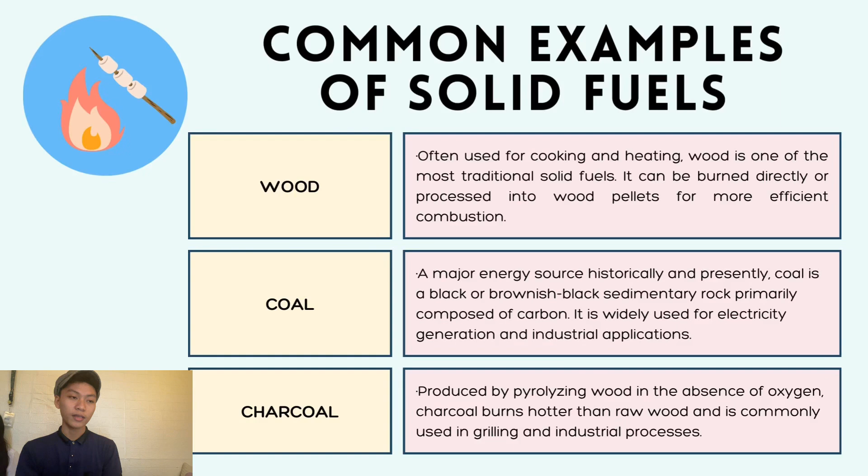Let's proceed about the characteristics of solid fuel. Number one is moisture. This is the water contained in the wood. When you burn wet wood, the water must evaporate first, which wastes energy. Dry wood burns better because it has less moisture.

Number two is volatile matter. These are gases that are released from the wood when it heats up. They include things like smoke, carbon dioxide, and other compounds that burn in the air. The more volatile matter, the easier it is to start a fire.

Number three is fixed carbon. This is the solid part of the wood that remains after the volatile gases have been released. It's what actually burns to provide heat and energy. Higher fixed carbon means the wood produces more heat.

Number four is ash. This is the leftover material after the wood has completely burned. It's made of minerals and other non-combustible elements. Ash doesn't provide energy but can be used as fertilizer or

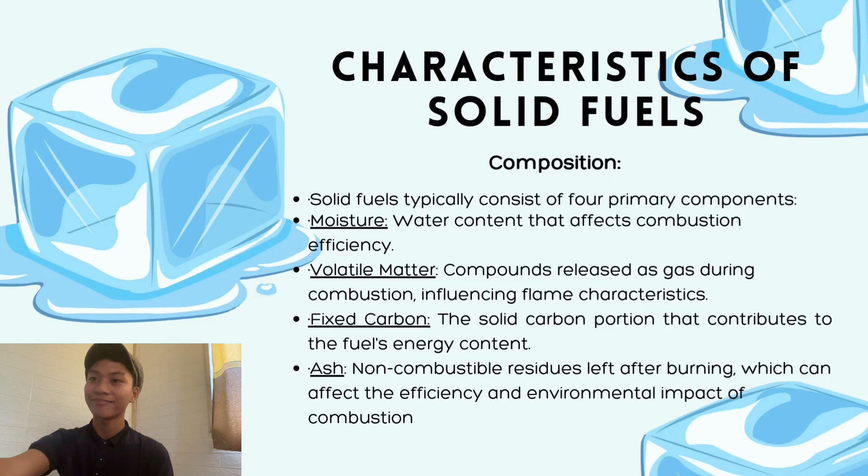disposed of. Now let's proceed to calorific value. This measures the energy released during combustion, expressed in units such as megajoules per kilogram. Solid fuels vary widely in calorific value. For example, coal has a higher calorific value compared to peat, which has one of the lowest.

Burning characteristics: solid fuels exhibit different burning behaviors based on their composition and structure. For instance, wood burns with a visible flame and produces smoke, while manufactured fuels like pellets tend to burn more cleanly and efficiently due to their uniform size and composition. Burning characteristics describes how wood burns, including speed and efficiency.

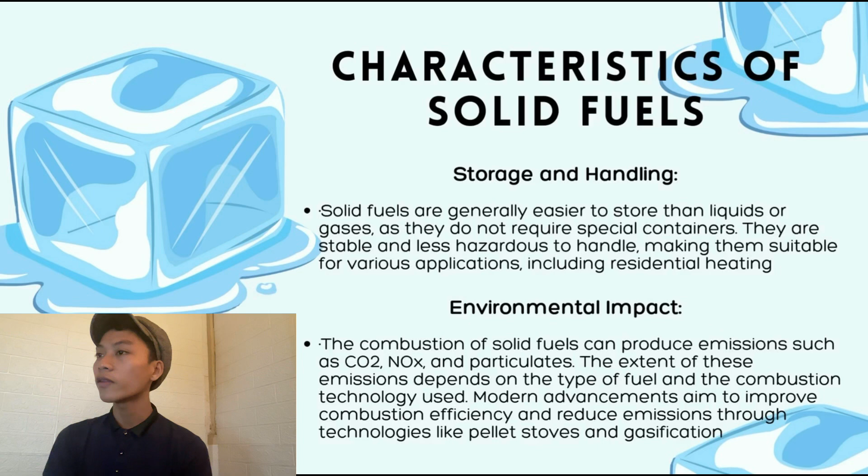Storage and handling: solid fuels are generally easier to store than liquids or gases, as they do not require special containers. They are stable and less hazardous to handle, making them suitable for various applications, including residential heating. This impacts the quality and ease of burning wood.

Environmental impact: the combustion of solid fuels can produce emissions such as CO2, NOx, and also particulates. The extent of these emissions depends on the type of fuel and the combustion technology used. Modern advancements aim to improve combustion efficiency and reduce emissions through technologies like pellet stoves and gasification. Environmental impact depends on the sustainability of the wood source and how it is burned.

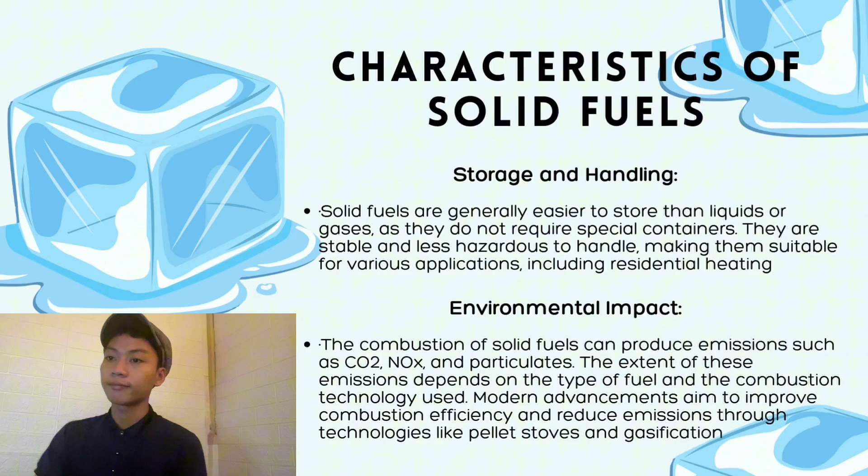Lastly, solid fuels also differ in renewability. Biomass solid fuels such as wood and other agricultural residues are considered renewable resources, while fossil-derived fuels such as coal are considered non-renewable resources as they take a long period of time to form.

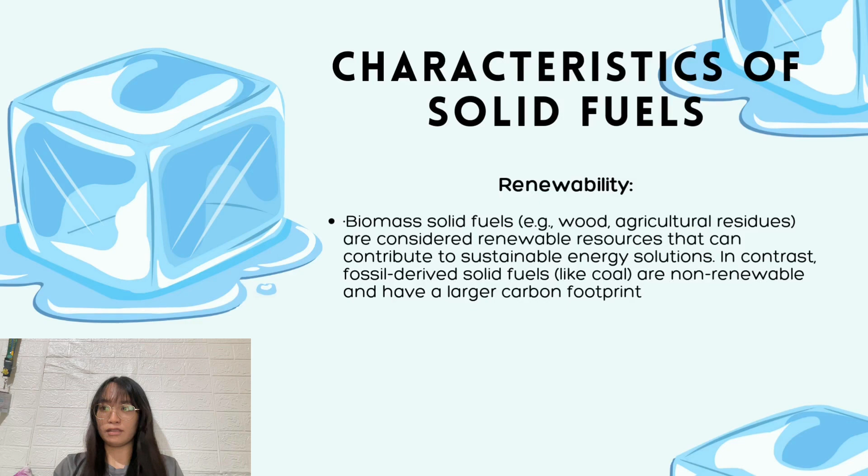Natural gas is a mixture of paraffinic hydrocarbons, primarily methane. It is found in gas fields beneath the Earth's crust and in association with petroleum in oil fields. There are two types of natural gas: dry natural gas and wet natural gas.

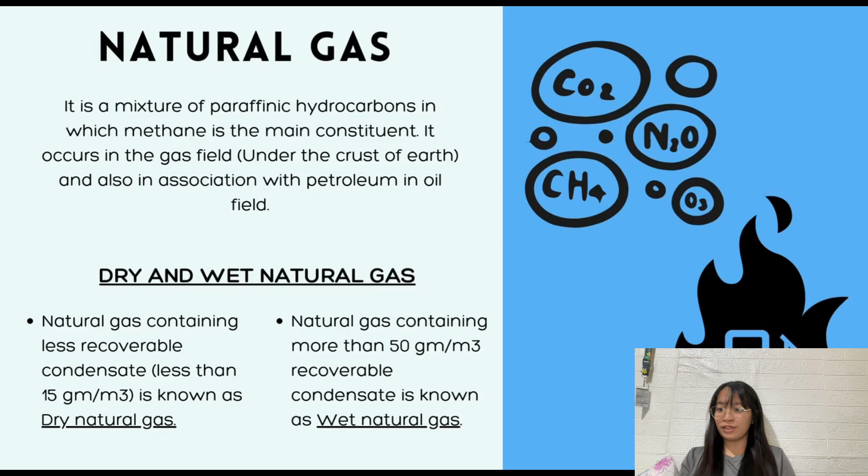The dry natural gas contains less than 15 grams per cubic meter of recoverable condensate, while the wet natural gas contains more than 50 grams per cubic meter of recoverable condensate. These distinctions are based on the amount of condensable hydrocarbons present in the gas.

This is the compositions and properties of natural gas. The table compares the composition and properties of dry and wet natural gas. Dry natural gas is predominantly methane, at 96.91%,

with minimal amounts of heavier hydrocarbons, carbon dioxide, and nitrogen. In contrast, wet natural gas contains less methane, at 77.22%, but significantly higher concentrations of heavier hydrocarbons like ethane, propane, and butane, which contribute to its higher gross calorific value of 11,200 kilocalorie per normal cubic meter, compared to dry natural gas, which has only 9,000 kilocalorie per normal cubic meter.

Additionally, wet natural gas has a higher specific gravity of 0.741, than dry natural gas, which only has 0.547, making it denser due to the presence of these heavier components.

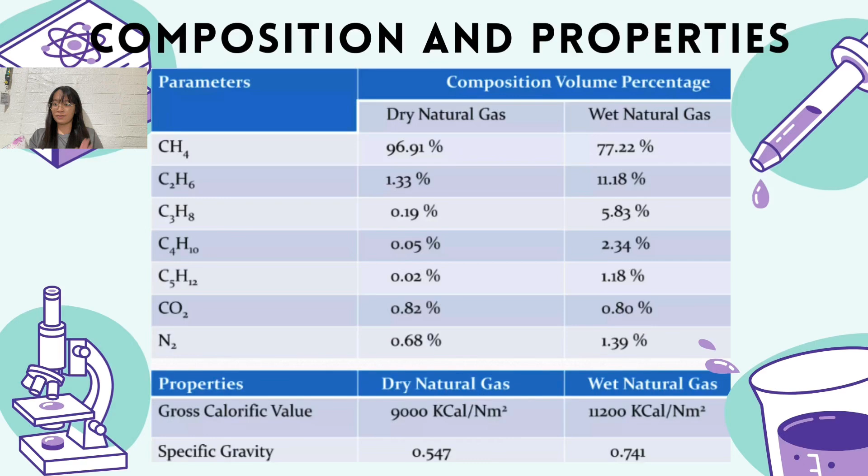These are the several key uses of natural gas.

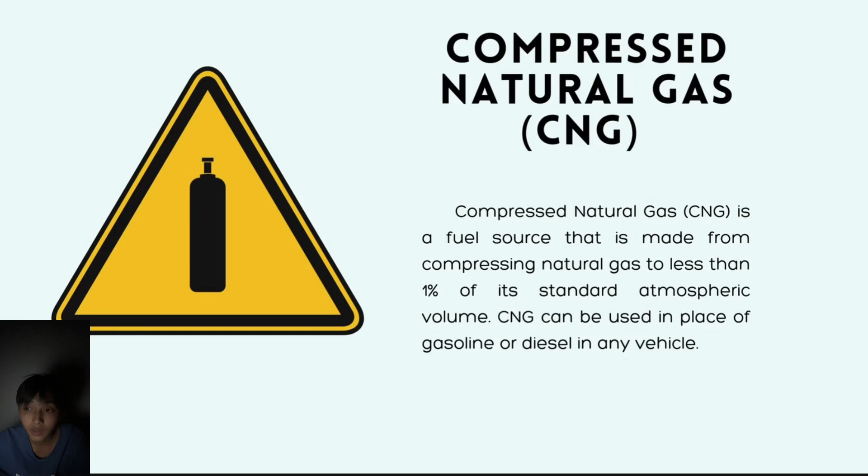Compressed natural gas is a fuel source that is made by compressing natural gas to less than 1% of its standard atmospheric volume. CNG can be used in place of gasoline or diesel in any vehicle.

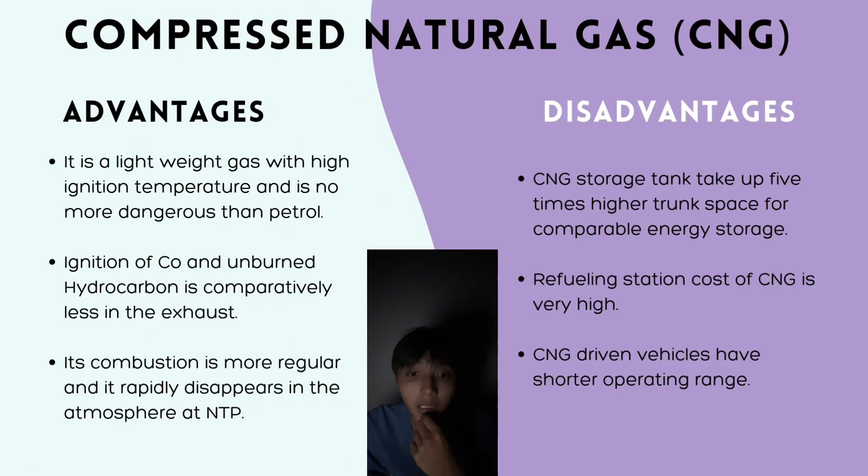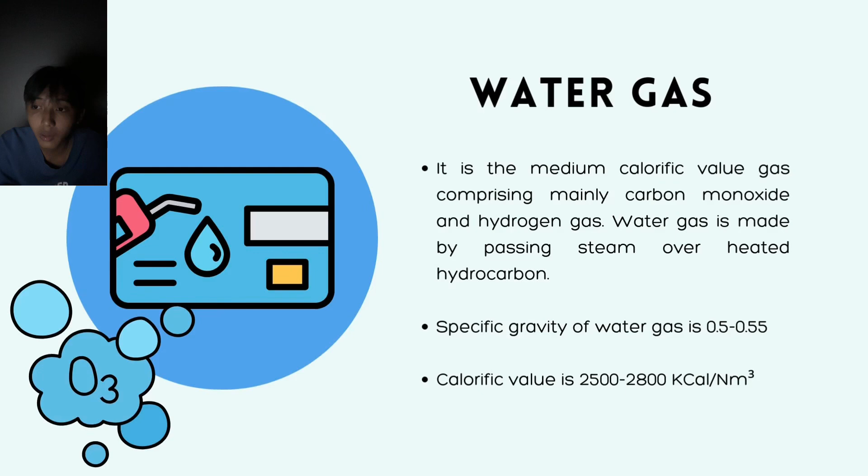And next up we have carbureted water gas, that has been enriched by hydrocarbon gases of high calorific value.

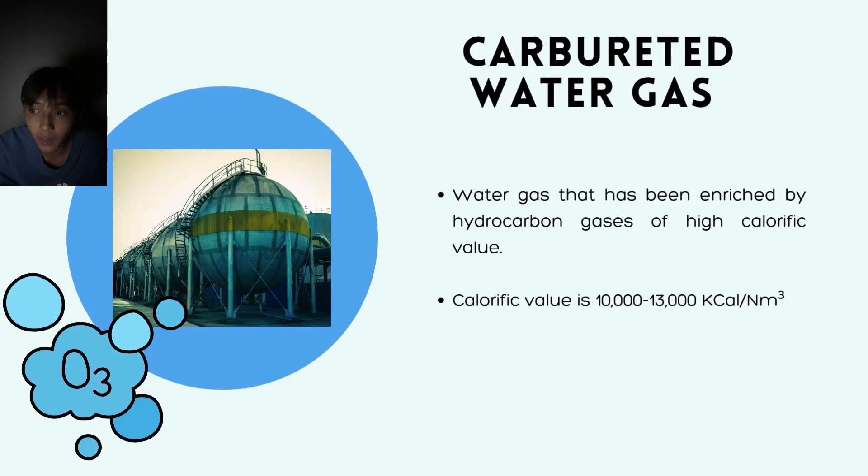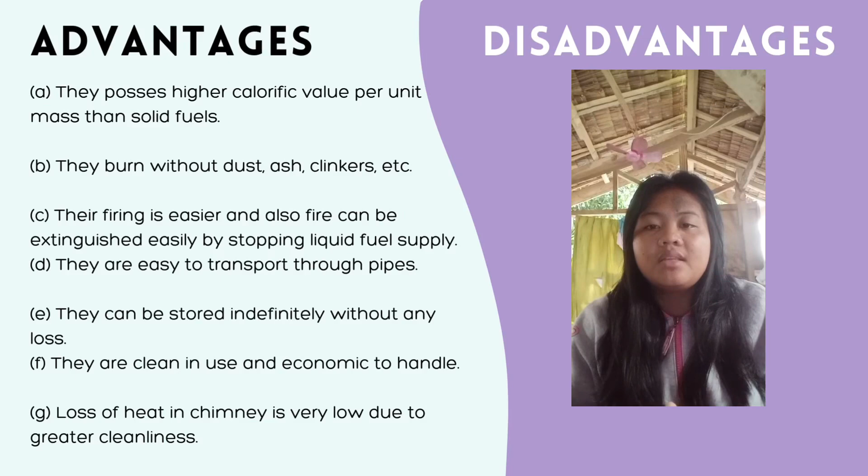Liquid fuels and their characteristics. Liquid fuels can be classified as natural or crude oil and artificial or manufactured oil. They each have advantages and disadvantages.

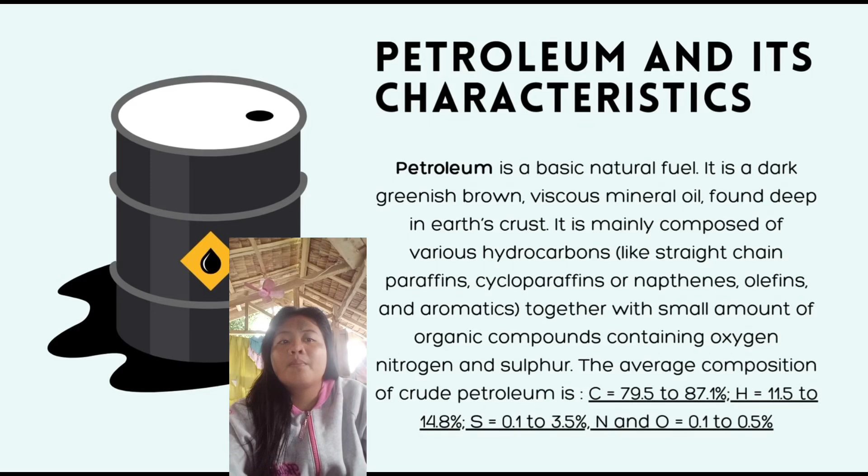Next, petroleum and its characteristics. Petroleum is the basic natural fuel. It is a dark greenish brown and viscous mineral oil found deep in the earth's crust.

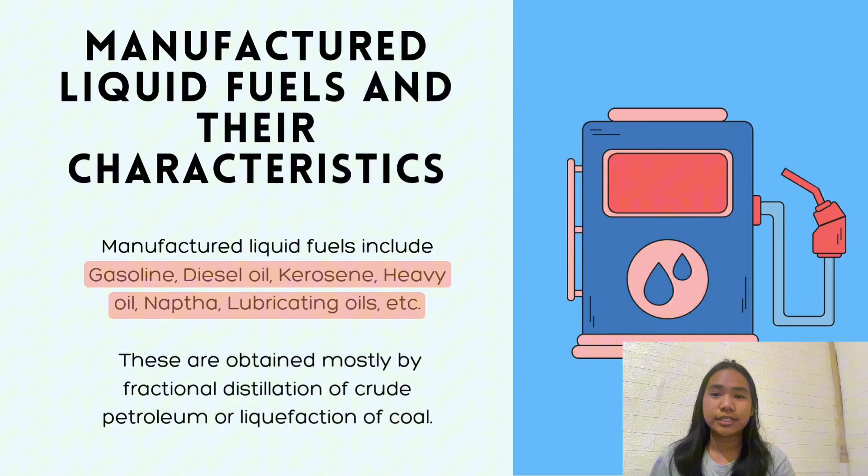Let's proceed to manufactured liquid fuels and their characteristics. First we have gasoline. Gasoline is produced either through the distillation of crude petroleum or by synthetic processes.

It contains some unwanted components like unsaturated hydrocarbons and sulfur compounds. These are not good because they can cause problems in the engine. Gasoline has a boiling range of between 40 and 120 degrees Celsius.

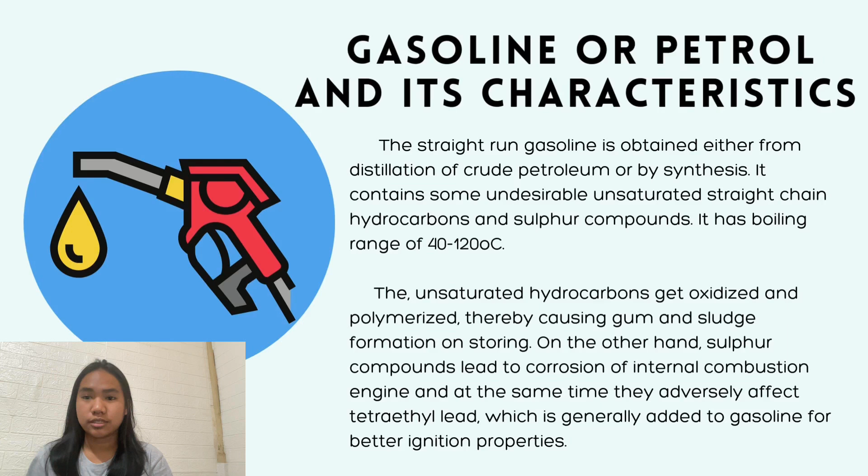Next is diesel fuel and its characteristics. Diesel fuel, also called gas oil, is derived from crude oil through fractional distillation at temperatures ranging from 250 degrees Celsius to 320 degrees Celsius.

It primarily contains 85% carbon and 12% hydrogen, with a high calorific value of around 11,000 kilocalorie per kilogram. This means diesel is a very efficient energy source.

The main characteristic of diesel fuel is its ability to ignite easily under high compression. Its hydrocarbon molecules are designed to be straight chains with minimal aromatic or side chain structure, ensuring cleaner and more efficient combustion.

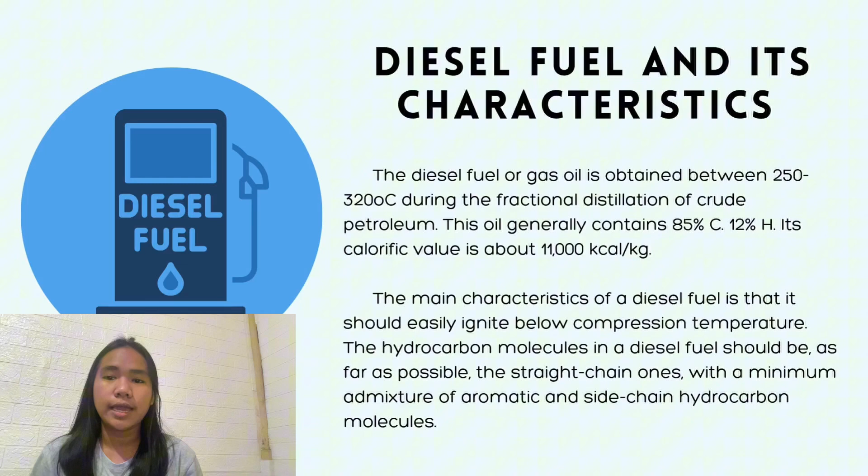Next is kerosene oil and its characteristics. Kerosene oil is obtained through fractional distillation at temperatures between 180 degrees Celsius and 250 degrees Celsius. It has various applications such as fuel for lamps, jet engines, and tractors.

Kerosene is significant in the development of jet fuel and has other domestic uses, like providing a smokeless blue flame when burned in excess air. It is always vaporized before combustion, which ensures cleaner usage.